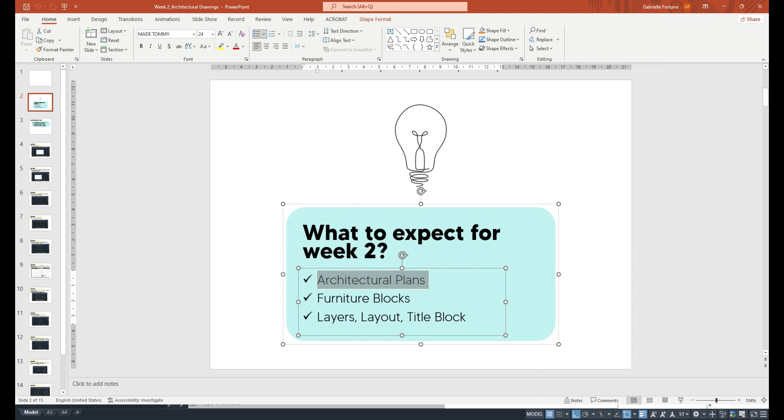First, we will tackle the architectural plans or floor plans. We will make them now. Next is how to download furniture blocks like beds, chairs, tables, etc. Next are the layers, which we already talked about in week 1. The layout and the title block, and also the dimensioning.

So in this exercise, we will make a floor plan from A to Z, meaning from your drafted floor plan or manual drawing, translated into AutoCAD drafting. We will transition from sketching into the computer. We will import your drawing.

Next is to create full specs of layers, meaning before we created only walls, doors, and windows. Right now, we will create a furniture layout as well. Next is detailing with dimensions, meaning detailing with texts like living area, dining area. We will introduce text right now. Next is hatching, meaning shading or putting diagonal lines inside a polyline. We will teach that now, and also labeling and tagging.

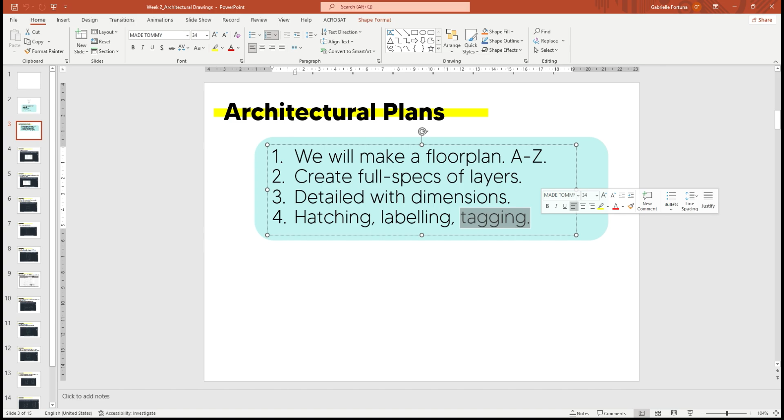So first, we will scale our image. With this exercise, I have put a series of steps on how you do this, so guided, there's no way that you will not know how. So let's start now in our AutoCAD, let's start drawing.

This is the empty space for AutoCAD itself. Right now, the status is I have the grid mode off. So we will turn that on so we can see the grid. I typed Z for zoom and then E for extents. So now you can see the grids.

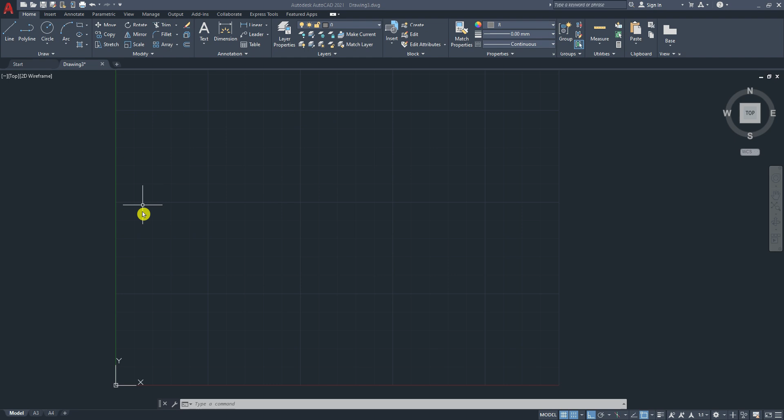What's the purpose of scaling? The purpose of scaling is that if you have a drawing that is not scaled at all with no dimensions whatsoever, you can manipulate it here on CAD just to trace it. It's not only limited to these types of drawings, but you can also import PDF, PNG, JPEG, or even from Illustrator, because not all files are scaled to millimeters or meters.

So right now, this is a typical PNG or JPEG drawing that we will import here on CAD, and obviously we don't have the specific dimensions here. So we will establish a reference point so we can scale the drawing to its right size and dimension. Even if you only have one dimension, like for example this wall, if you have this as 6 meters, that's it. If you have this as a reference line, you can scale the whole drawing.

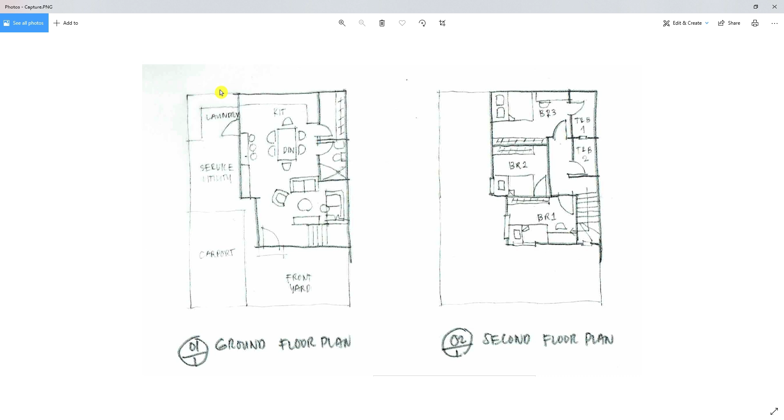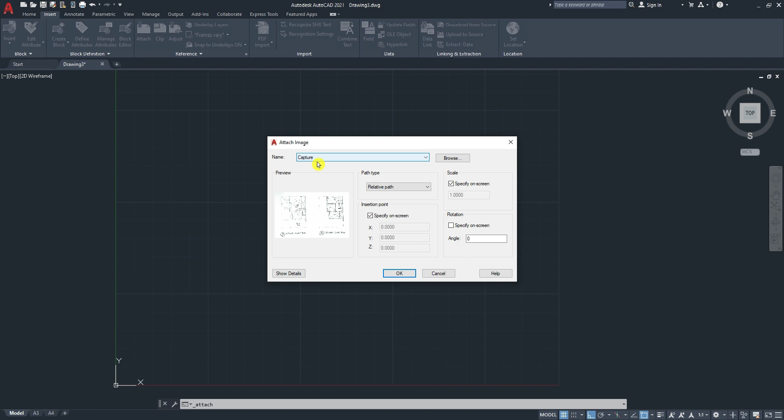So in insert, then attach, and then locate the file. The file that you have, you just scan it, or I really encourage scanning so it becomes flat and 2D. So we will go to the folder where you imported it or scanned the picture. Click that. The name of my PNG file is capture. So you click OK. Once you click OK, this is how it looks.

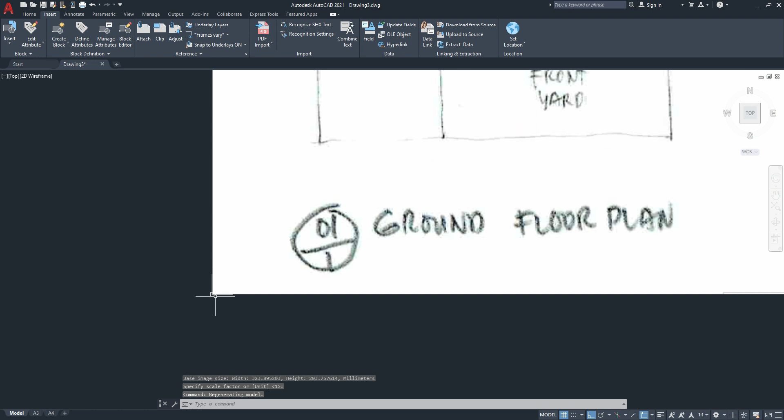I haven't clicked anything yet. And then when you click anywhere, you will have to specify another point. I normally just click anywhere. And then after that, it will be attached like this.

So for this one, I'll just have to check the units. If it's set to millimeters, precision is 0, etc. Always check this one to make sure.

And then now we will scale the drawing. So what's the first step? I propose that this specific wall here is 5.5 meters. That's it, that's my choice. That's my design. So I will scale this down or up, I don't know yet. So let's see now.

I'll make a line, L, enter. The layer for this is currently 0, since it's not yet important. This is the line, I will not make anything, I will just scale the drawing. So for me to know, I will type 5.5 meters or 5,500 millimeters.

So since I'm set to millimeters, I'll type 5,500, and then enter. Once you enter, since this line is bigger than your drawing, I will scale the drawing up because this is 5.5. Remember? So I made that.

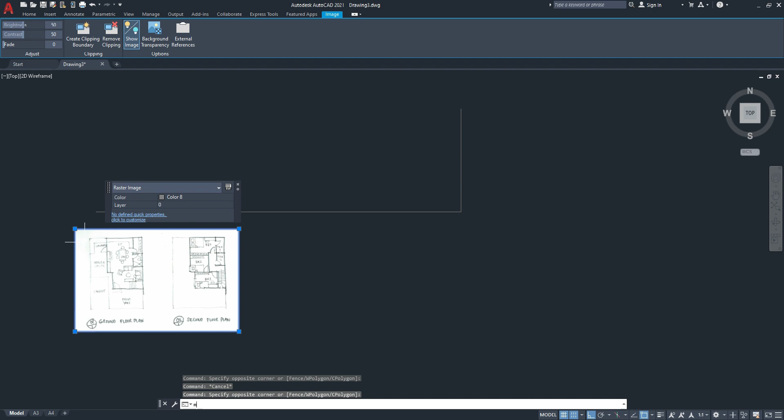And then next, since this is 5.5, I will select the image, press M or type M for move, enter. This cursor is tricky because the image is white and the cursor is also white, but bear with me. I will put this cursor here. I hope you can see it. Here.

I will put that here and then press F8 so it doesn't freeze, to activate ortho so the movement is better. And then I'll put it here at the very end. So what happened now is I'm positioning the drawing, this wall specifically, in line with this specific line from CAD so I can scale it.

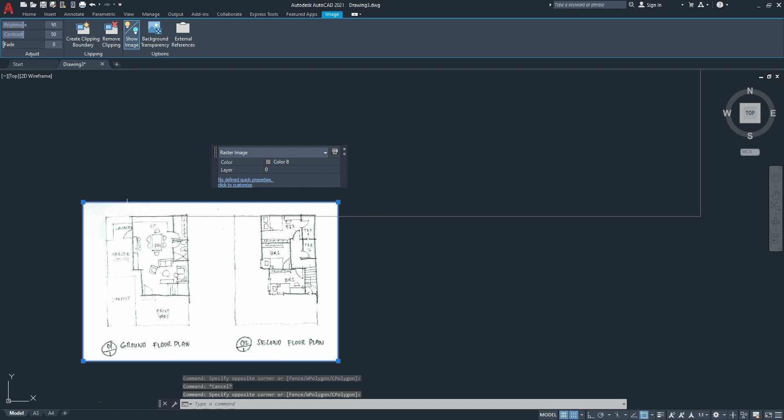Just rewind this video if you get confused, because this is a process. And then next, I'll highlight the drawing, press SC for scale, SC for scale, and then enter.

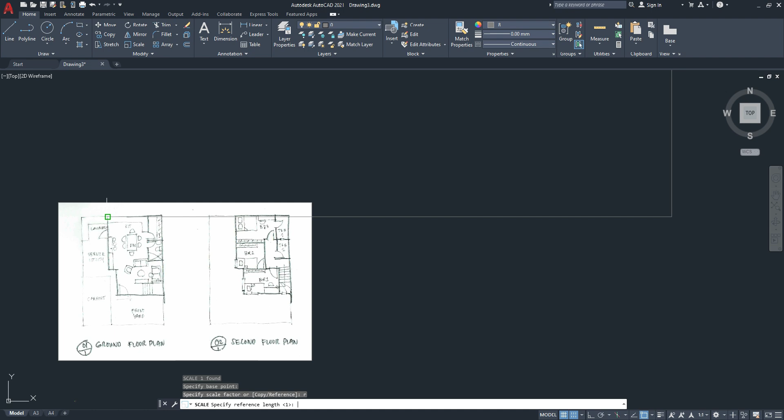First, it says specify base point. So the base point here is the base point of the wall, this is my wall. Next, specify scale factor. I'll type R for reference because I want to do scaling by reference. Press R, then click again this point. Next, click the image's other point, which is this one, the wall, so the third click goes here. And there, you have scaled your drawing.

So that we can see it clearly, I will make this into cyan and make it bold. So, you got the point.

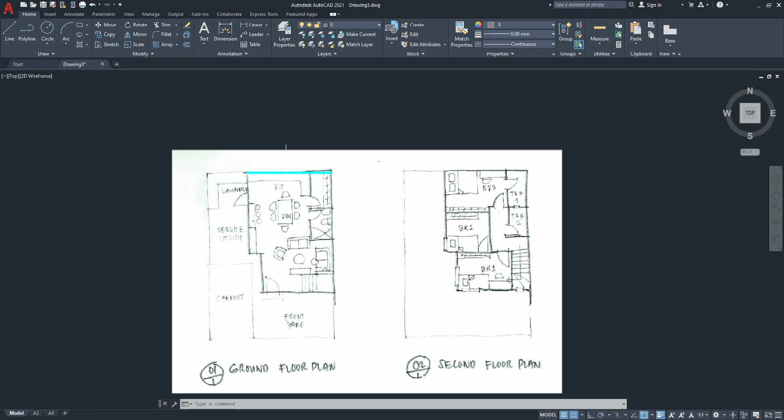Since the PNG or image file is not yet scaled, I scaled it to 5.5, which is literally the same scale as CAD. So this is numerically correct now, 5,500 is the wall itself of your drawing. Why am I teaching this? So you would know how to scale any type of drawing if you're given a drawing that's not scaled at all, so you can scale it. I've used the SC command many times already and it's very, very useful.

You'll just memorize that in the future. So here you go, the image is scaled now. This is 5.5, you don't have to be super exact, unless CAD lines are also what's being scaled. But this works as well, not only on PNG, but also on CAD lines. You can scale overall.

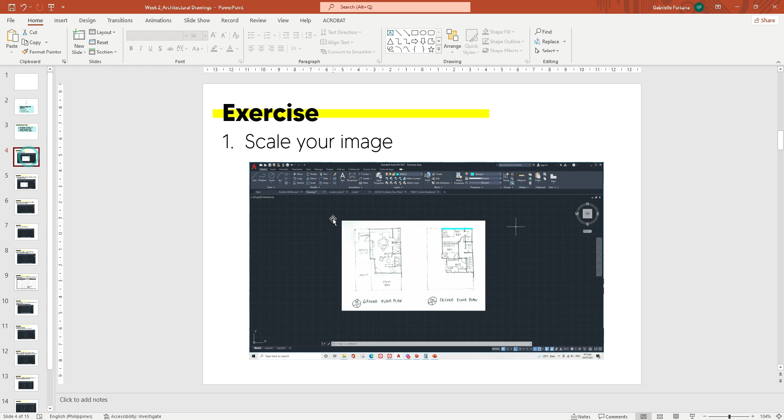So let's go back to our slide here. After scaling your image, which we have done, now we will draft our walls, just the outline of our walls. Take note, when I draft my walls, I use the lines of the center line of the walls. Then after that, I offset the exterior and interior using the defpoints layer. You'll know why, just follow and watch for now.

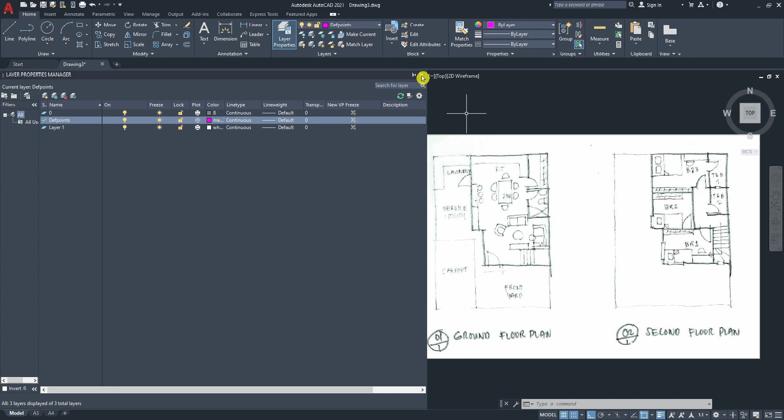Right now, I have set my defpoints. I'll type LA. I have set my defpoints with magenta as the color. Take note, I made it magenta so it's clear in the video, so you can see it. But if I use this in real time, I use graphite gray to symbolize like a pencil, not final yet. But right now, I used magenta only.

Next, after that, checking the defpoints here, check as well that all of this should be by layer, because maybe some of yours is continuous or whatever. Just make sure everything is by layer only, meaning whatever you're drawing here, whatever lines you're drawing, the properties of the line are by layer. Okay, so I'll type PL.

Since this is already scaled, I will just follow this one. So I'll type 5500. And then going down, I will just follow my draft, because this draft is really scaled in the real world, but it has no dimension yet. So this one is probably 8,000. It's up to you, I'll make it 4,500. So we're just following the lines here.

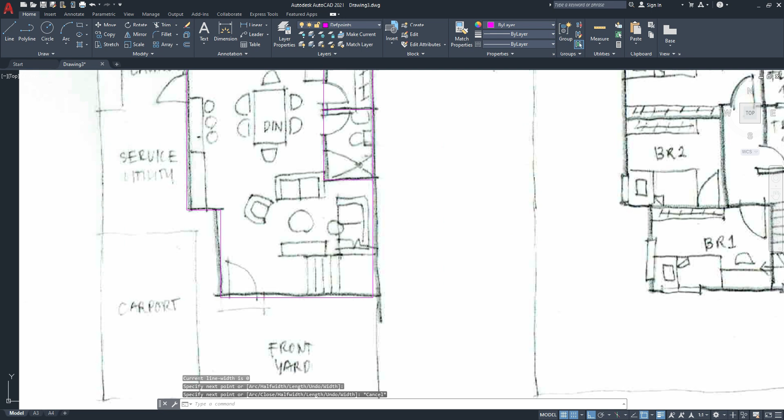So 1,000, like that. Follow the whole lines. For example, that's it for now. And then I will also follow these lines here for the CR and the wardrobe. This is typically just the outline of all the partitions inside. The stairs, I will not put yet, okay, so only the walls for now so we do it one by one.

Then I will select the image and move it somewhere. But when you move it somewhere, make sure you know how many meters you moved it. So for me, I'll put 15,000, so that when I move it back, it's still exact. Okay, so here is our outline for the walls, the center line of our walls.

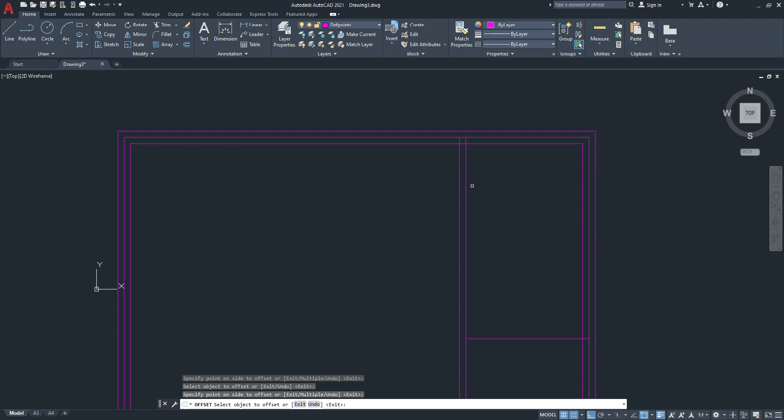Now what I'll do is type O for offset. Make sure it's on defpoints, not printable. Since my walls are 150mm thick all in all, I divide it by 2, so 75 outside, 75 inside. I'll type 75, then click here, 75 outside, 75 inside. Same for this one, 75 inside, 75 outside. I hope you get the point here now.

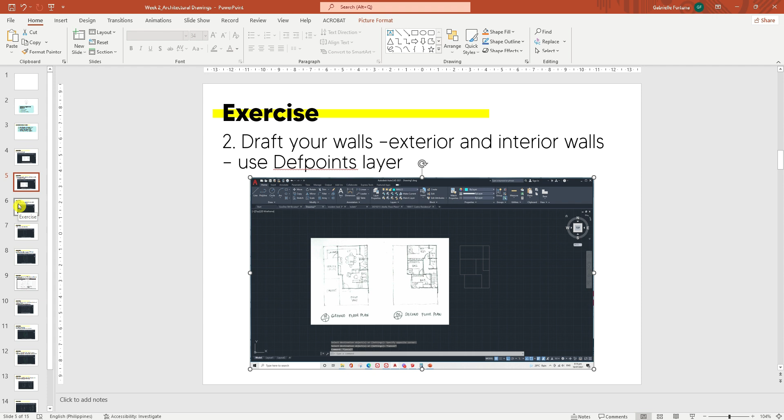So your walls will be like this. Let's go back to PowerPoint. So this is what it looks like, we have a draft there with defpoints as pencil marks. And for the second one, it will look like this, except it's magenta. So offset 75 in and out for exterior walls, depends on your design. If the thickness of your wall is only 100, put 50 and 50 inside and out.

Okay, next, put doors and windows. So let's put doors and windows. I'll type again and make a new layer for my doors. It's unprinted, oh, so make sure it's set to printed. So my doors will be yellow. And then I'll change the magenta because it hurts the eyes, so I'll change that so it looks like this now. Then doors will be yellow, while my windows will be... actually the doors are red.

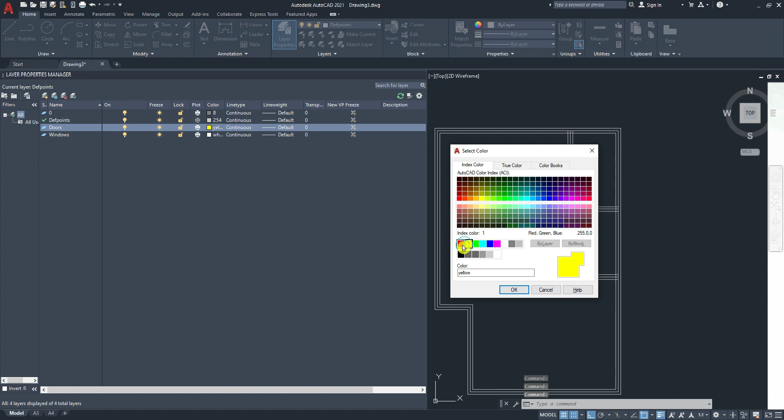And then, yellow ang aking windows. Okay, gi-default ko muna ang line weight because you will decide, guys, kung anong line weight niyo.

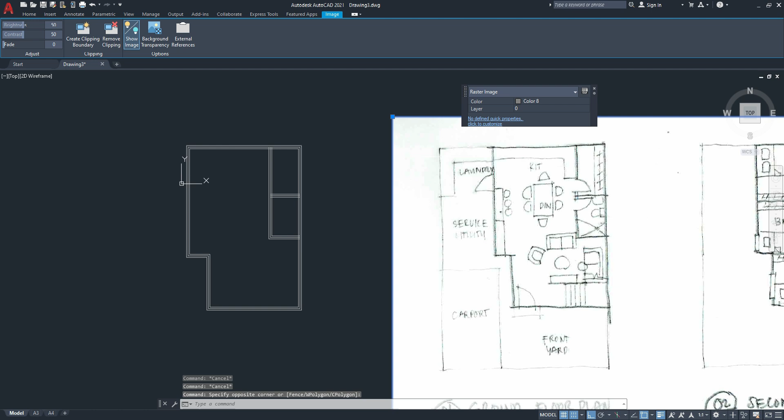So I'll make my doors. Same thing na ginawa natin before. I can put back or move back, M enter, this drawing. Balik ko siya 15,000, i-remember niyo lang ginawa niyo. Then para, I'm pressing the control, the scroll button here. Kaya siya ganito ang itsura.

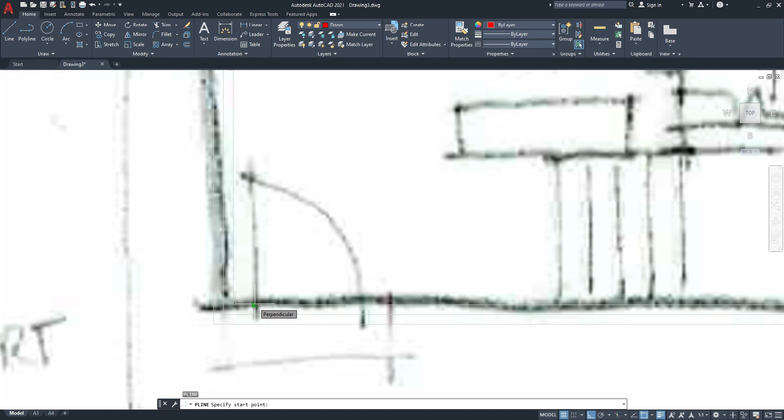Itong door, let's make a door here. PL, same thing na ginawa natin. Oh, hindi pa naka-layer ako ng door. So, PL, hindi siya masyado klaro. Siya mag-snap. So, that's my door.

Copy, paste. My door is 900, 900 ko na lang. Then, same thing. This is our lesson 1, so hindi ko na to ulitin.

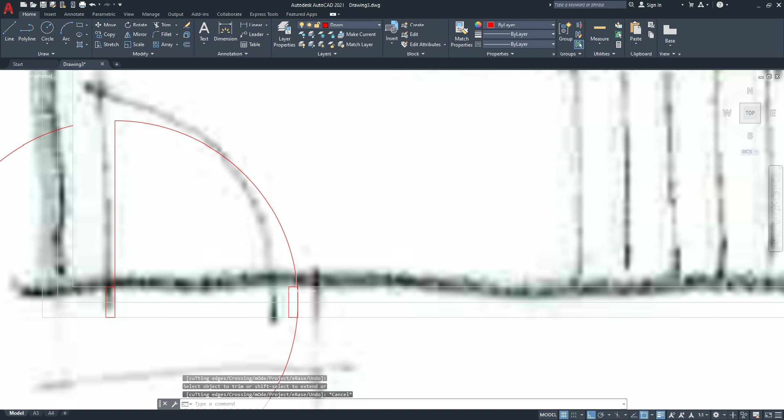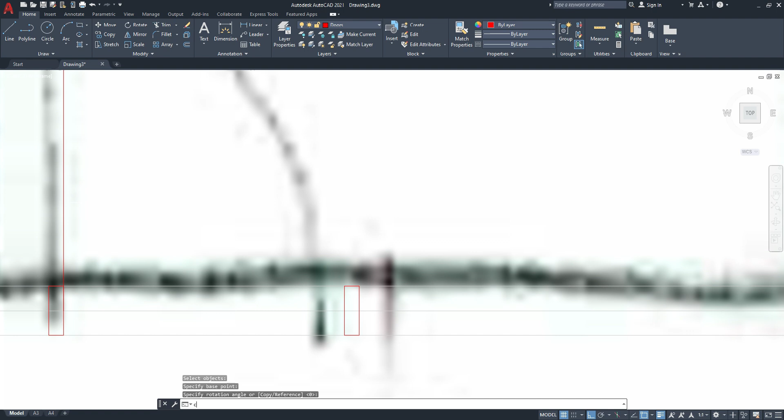TR, double click for trim. At, mali. PL, kaya kailangan dyan dito. Kaya magkamali siya. Rotate, RO. C for circle, and then TR, double enter.

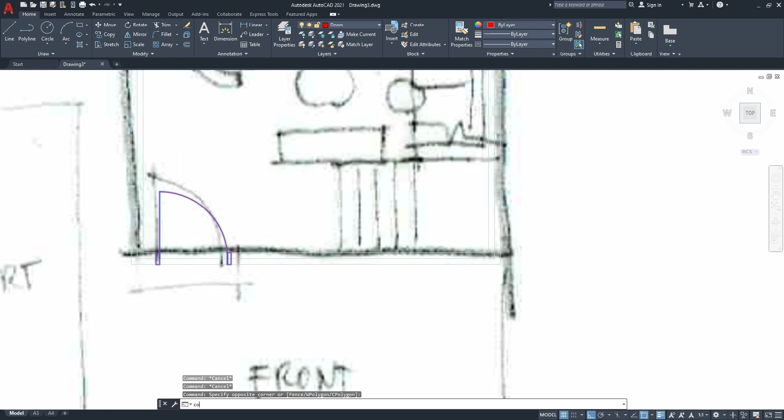Sa first lesson na natin ito, so I hope you know na already. Okay, so linisin lang, and then after this, I'll make this into a block. Door 1. So for the purpose na mabilis lang, all the doors are door 1. But sa inyo, for sure, you have your 900 na door, 600 na door, etc.

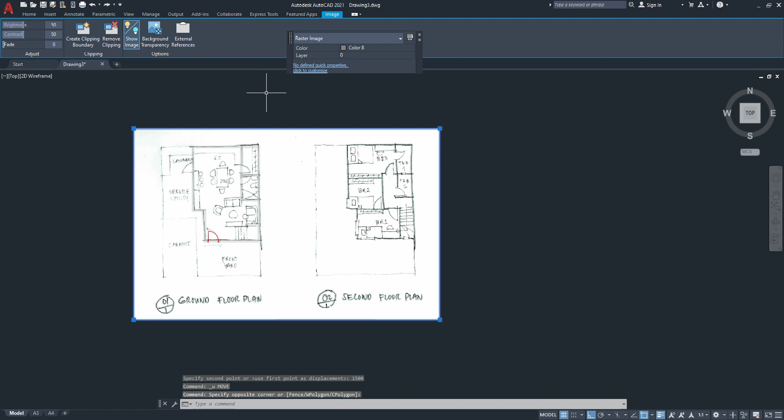So I'll put my door here. I-memorize ko na lang muna ang door kung saan because hindi na maklaro if nandyan ang image. I'll move the image again here. I'll move it again there. So yung def points, guys, hayaan niyo lang yan, hindi mo yan ma-print, so it's okay that it's there.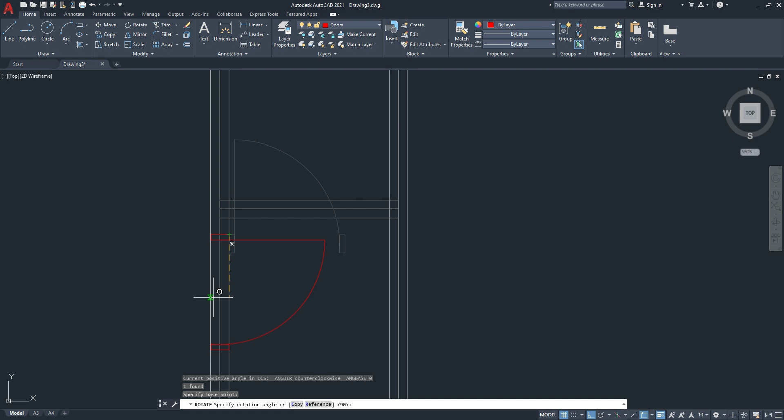So I'll copy-paste this door, here, rotate, RO. There, oh careful again, RO. Yan. Then MI for mirror, and I'll click here para dito ang center, kaya MI. Do you want to erase? No, so type N. So that's your door.

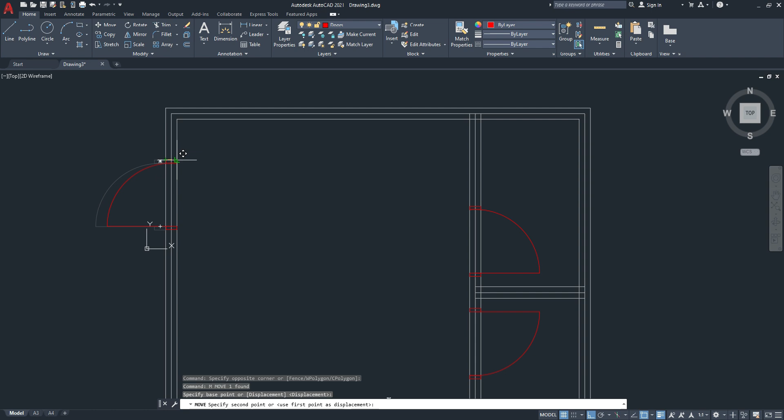After that, door naman dito sa may kitchen banda. I'm just checking the orientation. And then move. So that's your door. Next, your windows, kayo na bahala niyan.

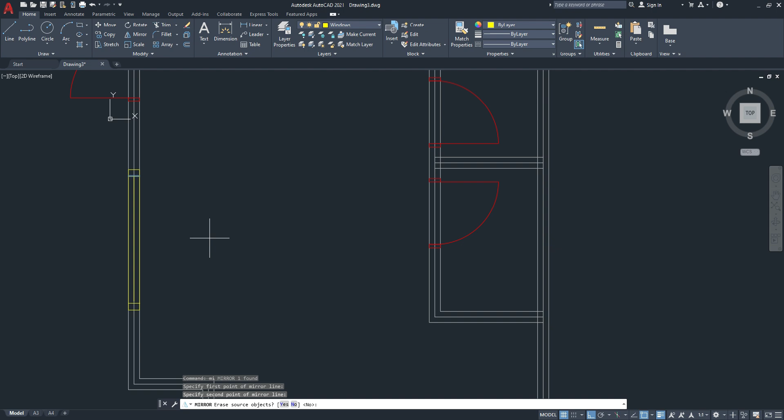So for the windows, I'll change my layer. REC na tayo para mabilis. So for example, dito yung window ko, that's my window. Draft ka lang ng window. Copy-paste ka lang, or mirror ko lang yan. Then put it sa midpoint ng window mo para dyan. Yan, so that's my window.

So imagine, guys, itong window lang at door ang printable, but your def points not yet, kasi hindi pa final ang wall. Ito ang suggestion ko, last niyo na ang wall para isang drawing niyo na lang lahat. Pag na-plus na position na lahat ng doors and windows, saka niyo na siya gawa ng walls.

So itong window, I'll make this as a block. Window 1. Then copy and paste. So example lang yan, I'll move it here. Copy and paste ulit, move it here. So guys, sample lang to ha.

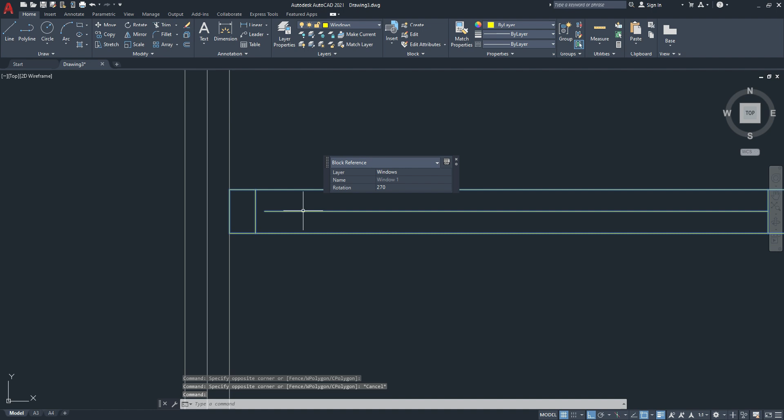So, RO, wala. See? So here's the thing. Since naka-block tayo and mali pala ang drawing ko, you can just double-click that, open this one, and then correct. Isang correction lang, okay na lahat ng windows mo. Okay, so this one, rotate, RO. And then I think I'm done with my windows.

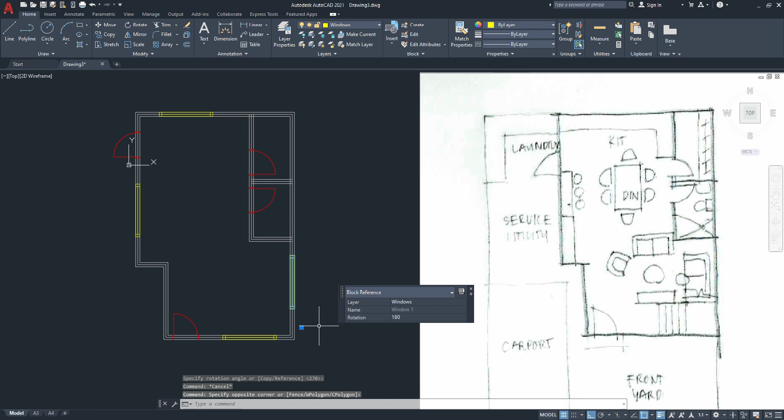So after na tapos na kayo sa window, let's go back here. So you have your windows and you have your doors. What's next? Outline now the walls in your wall layer. So I suggest start with exterior walls first, then the interior.

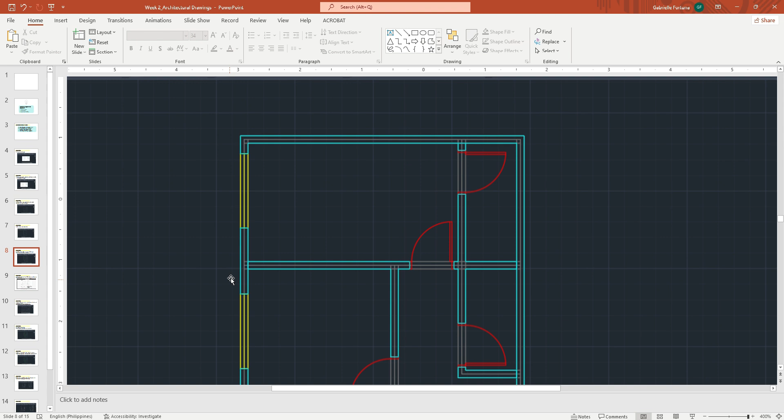So ang itsura niya guys, balik pala tayo mga doon. So itsura niya, ganyan, malinis na, kasi na-outline niya na. So make a layer of a wall using cyan. You can always make your own color, no need to make gaya. Then kayo na mag-set ng line weight ha.

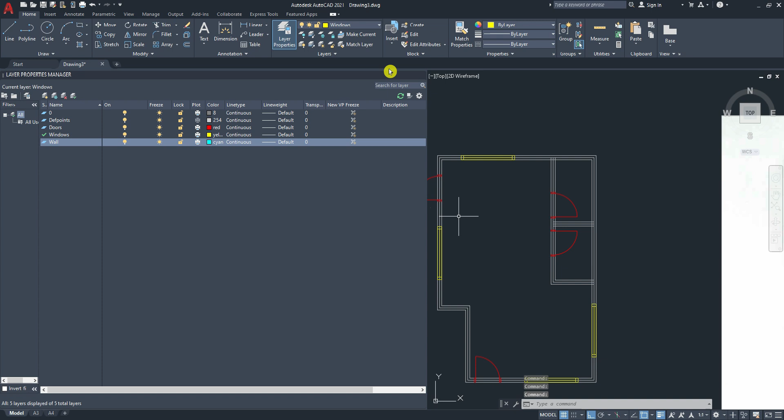Okay, PL, so I will just make the wall layer active. So there, so halos ganyan lang itsura, guys. So parang siyang i-outline lang.

And then, if you can see this type of layout, mag-REC na lang kayo para mabilis. REC for rectangle, para diretso lang ganyan. Ganyan, gets niyo? Then ito, PL na naman, and that's it, you have your floor plan na.

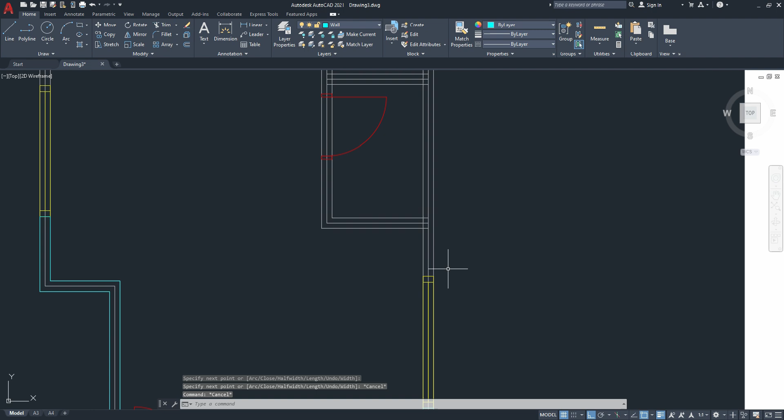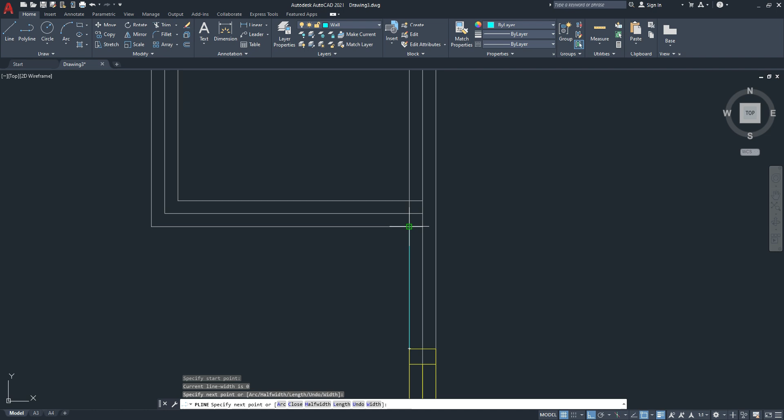Very easy, very convenient. This one, others do this. REC, and then tibok wall, and then i-trim-trim na lang nila. But for me, I like it na parang seamless lahat, parang very clean, very tidy. Parang ganyan na siya, so parang unending tracing na to siya.

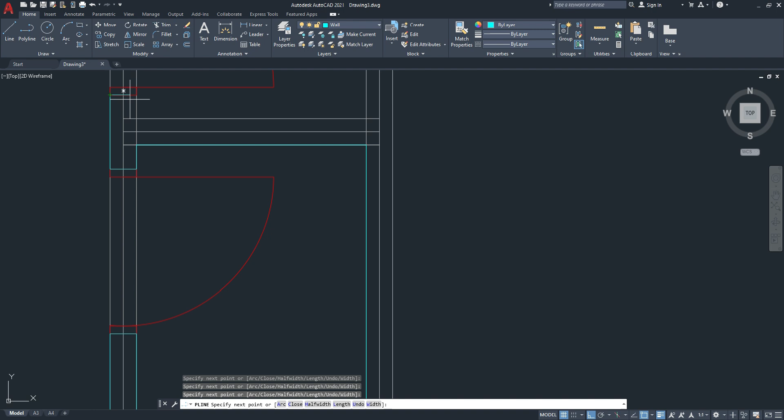After the walls, what's the next step? Go back to your PowerPoint. It is to download, or shop as I call it, for CAD blocks on the net. Shop for beds, toilets, sink, range, sofas, and etc. So this is an example of the tab that I typed at cad-blocks.net for toilets. So let's try to make a bathroom. Okay.

Let's type bathroom CAD blocks. So, bathroom CAD blocks.

Let's see, and then extract files. After extracting, I'll open it, and if you can see, it is an AutoCAD file now. There are two ways for you to import these into the CAD.

First is to just simply drag it inside the drawing, but I don't normally do that. What I do is open it. So it signifies that you are opening two drawings already here. Don't be confused, just switch between the two different drawings.

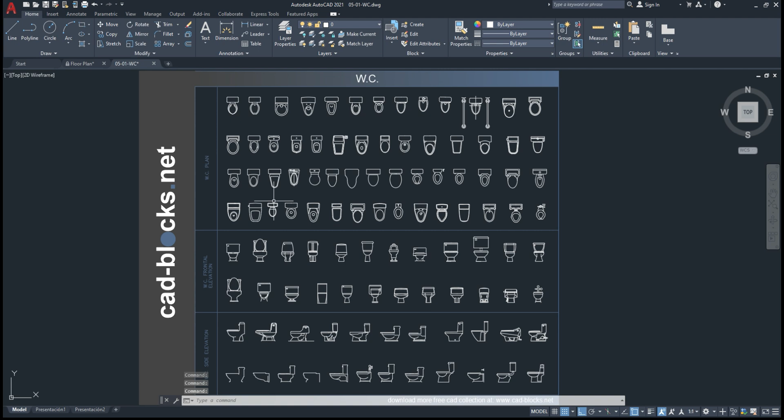If you want to go back to your floor plan, then go. And if you want to go back to your toilet, just click this tab, okay? So right now, I'm going to select the best toilet for my liking.

So this one, maybe I'll choose this one. I'll copy paste this. If you can notice, this is a block. So I'm copying a block and then pasting it here.

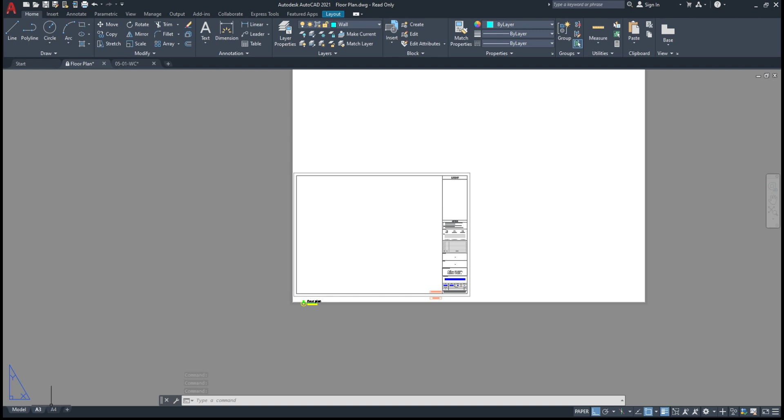If you get confused, guys, go to the model always. You will click this tab here at the bottom, click on the model, and then I'll simply paste here.

So what happens? The block is now on layer 0, which is okay. I'll make a new layer, and make a furniture layer.

For my furniture, I really want it to be very light and not colored black, for me, huh? So I'll go to true color and mix a gray to my liking.

For example, I have that already, that's a true color again, that's a true color. And then after that, I can use it.

So I'll select the block and then change it to furniture. That's clear, right? So all the lines in this toilet are set to my liking, which is in the furniture layer.

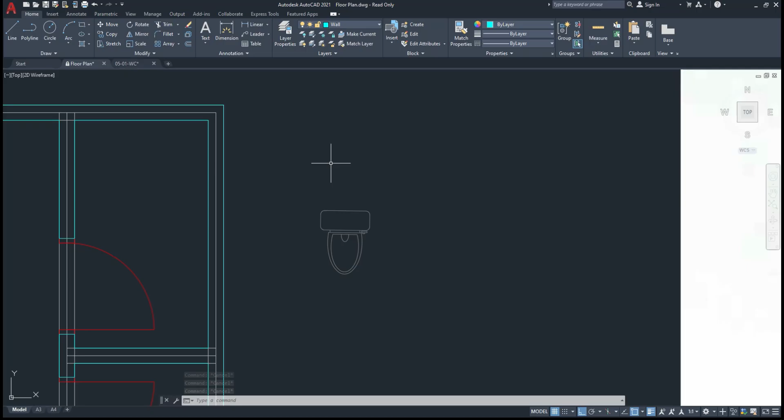Beware, guys, because other blocks don't have that type of behavior or properties. So what I normally do to reset the lines from other drawings: I select the drawing, type X, meaning explode, and click enter. After that, I exploded the block, and if you can see, I can select each line. So it's literally exploded.

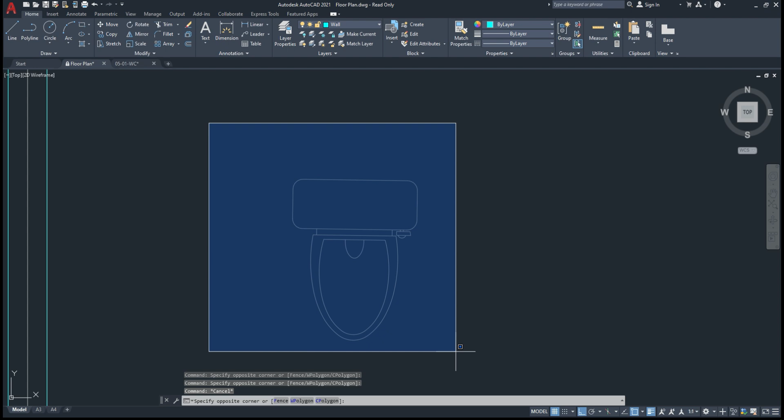So the behavior of the lines or the layer of the lines, I can manipulate them now. I select all the lines, the polylines and the lines there, and select into furniture, and that's it. And I re-block them. My term for that is resetting the block.

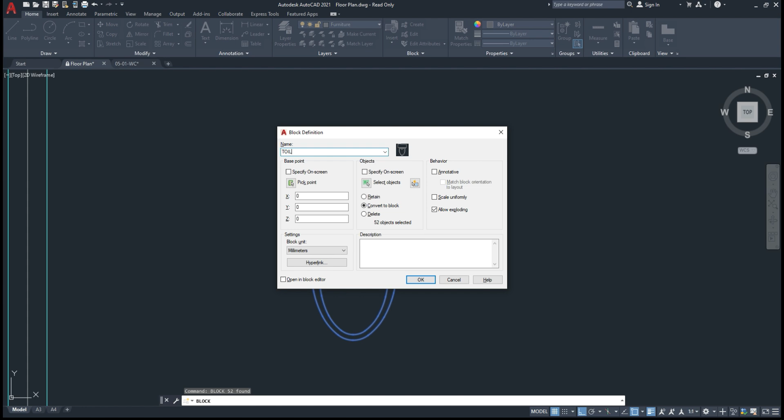Okay, so this is the toilet. So that's how the blocks are behaving. So I rotate this one to make it fit in the bathroom.

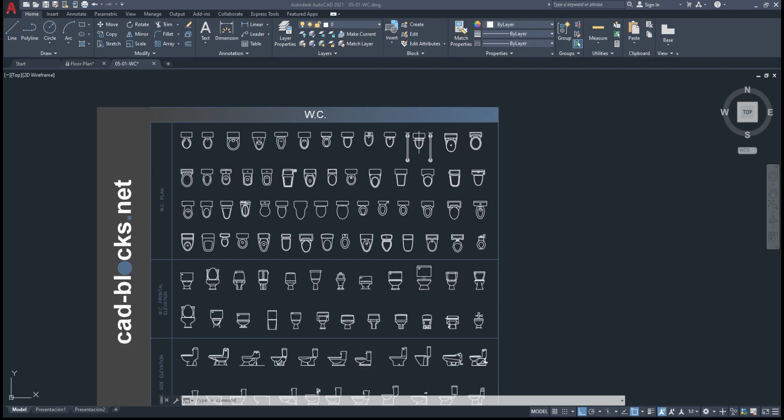For example here, now go back here again, just making sure, for example, I want a urinal. I can also type in here in your search engine. And for this case, if you can see, you also have your section and side elevation. So everything is provided if we will make the sections in the future.

Going forward, I will not put into details because you will put all of the furniture that you want. Now I have put my living room, simple ones, dining and the toilet, just to give you an example.

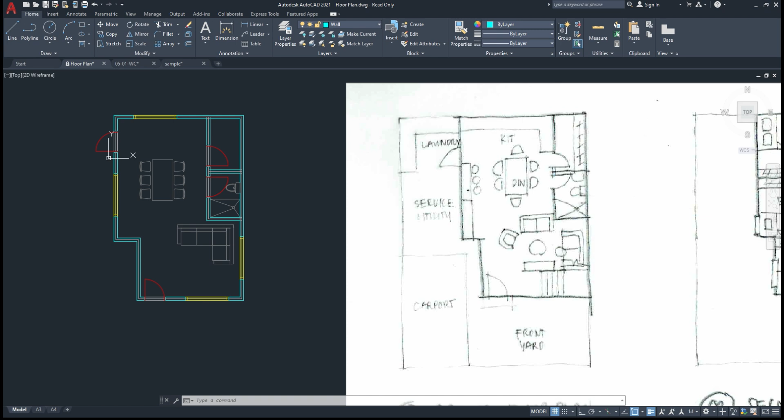You will fill your floor plan up, all the floor plan from your service utility to your laundry or whatever, like in this drawing. There's also a wardrobe, there's a kitchen. So right now, for time's sake, I will not do that now.

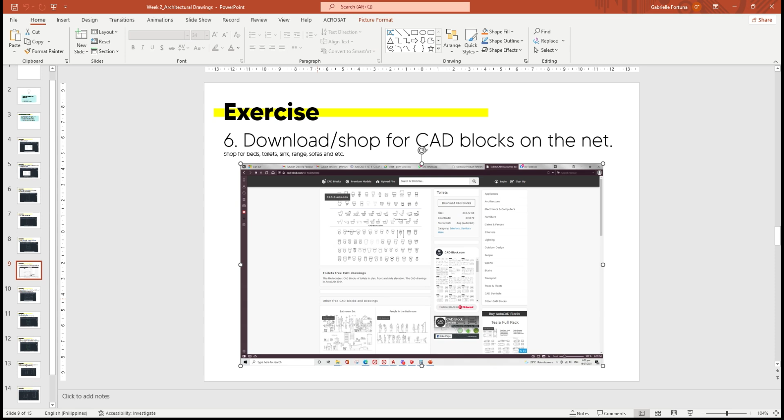Fast forward a bit. So after you have done all your furniture, what's next? You also have here copy paste, change layer. I put that in the series, and it will somehow look like this.

About dimensions, I have made a preset or a template for the dimensions. This is a very, very basic template that would somehow fit different scales. In Revit in the future, you don't need to do this because the default per scale is already set.

But on AutoCAD, our goal is to at least somehow make all the dimensions proportional to your scale. So I'm giving you this drawing dimensions in a lower version so that it would be compatible with any version, 2013, 2020, or whatever.

For example, in my floor plan, I'm switching drawing tabs. Okay, so in my floor plan, I don't know what type of dimension fits me. So what is the command for dimensions?

DLI, meaning dim linear or dimension linear. And then I'll press enter. This is just an example. So for example, from this wall up to this wall, what's the dimension? It's 5551. If I go to my template, which I will send you, I will copy this one, copy all.

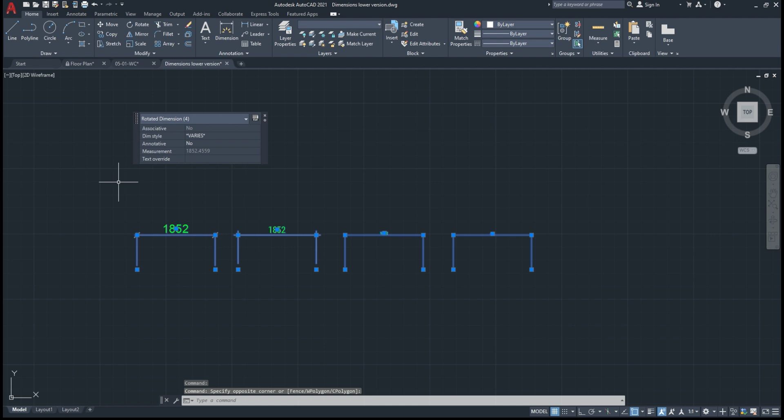And then paste it here.

If I compare the floor plan I'm making versus this dimension here, which do you think fits best? Number 1, where the text is proportional in size, and number 2, which is very visible to the eye? Of course, I think this one, the second one, fits best.

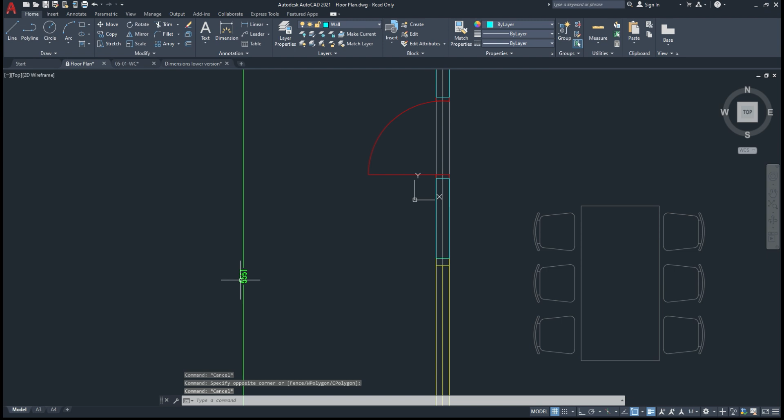This one that I'm doing now has a different property for dimensioning, while this one is also different. So there are also layers for dimensioning, which we talked about earlier.

So if I want this type of dimensioning applied to this, I'll type MA, which is match properties, enter, and I'll click the first one, whichever is my model or whatever I want to copy. Then after I click that one, I click the other one, whichever I want to influence for my dimension, which is this one. So I click, and that's it — I just pasted the dimension style.

So this is how it works — you go and make all your dimensioning. For example, this one, I'll put it here, because you have your default dimensions, it's not preset yet like what I did here. So if I have this one, okay, that's set. I have my dimensioning already, but it's not using the same layers as this.

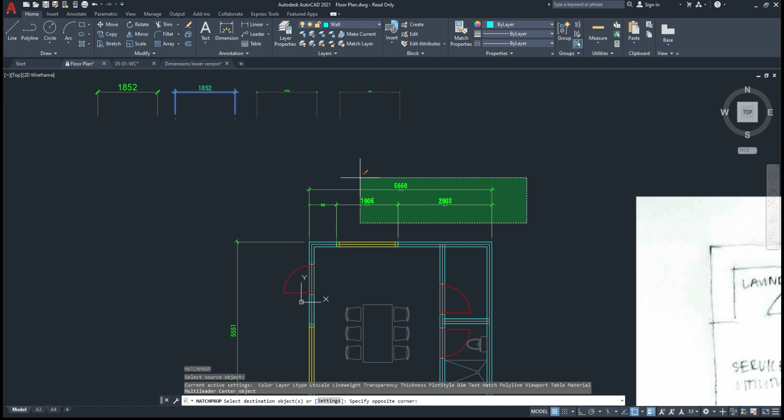I'll type MA again to match this one. Click this first, then click here, and then drag it on like this so that all the dimensioning gets influenced. Then, fast forward again — if you've done everything for the dimensioning, it would look like this.

Make sure everything is aligned. I will teach you one command which I use for dimensioning, which is stretch — S for stretch. If I click S, enter, then select from bottom up this specific area, then enter, I can drag the whole dimensioning so it doesn't get disturbed.

For example, if I want it to be the same as this at the bottom, I'll just stretch it like this. And if I want only this specific area to be stretched, I'll press S, select only this area specifically, then enter. I can move it up or down, so I can isolate it like that.

So whatever you select in the specific box you created, again press S, and whatever you've selected — like this green box — only what's within the scope of the green box gets stretched. But if I also include this outer one, it will also move. It won't only apply to dimension, it will also apply to all lines that are included.

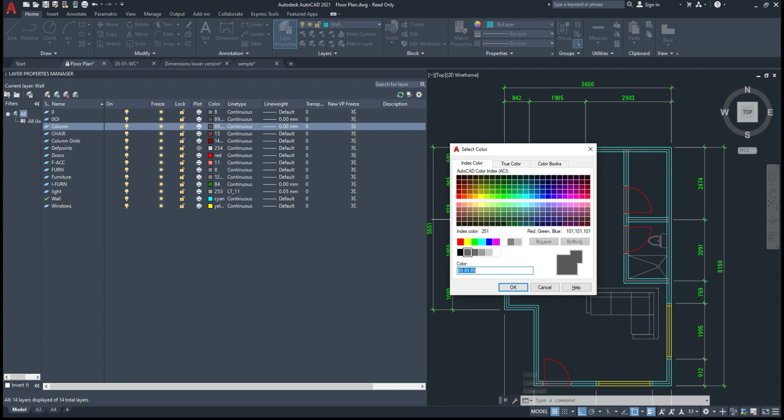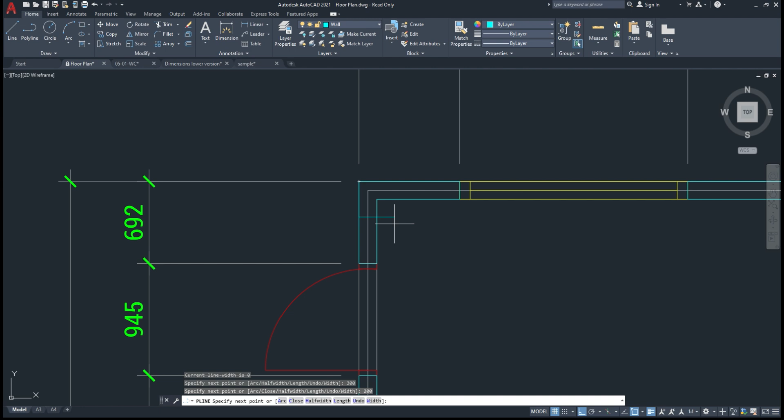So I'll make my column layer, and make it, let's say not true color but indexed, like blue. As for the line weight, that's up to you. So for example here, I'll make a column, let's say 300 by 200. There, that's my column.

I made it here just as a guide. So now I'll move it here for instruction purposes, because I'll make a hatch inside of it. So I'll select this one, change it to the column layer because I wasn't set to column as the current layer. Now it's in the current layer.

Now, since the column is solid, the main foundation of the building, I want it to be hatched inside. So I'll type H for hatch and click inside to fill it in. You have a lot of hatches available — bricks, diagonals, solid. For now I'll use the solid one and fill it inside the polyline. If I'm happy with that, I'll just click enter.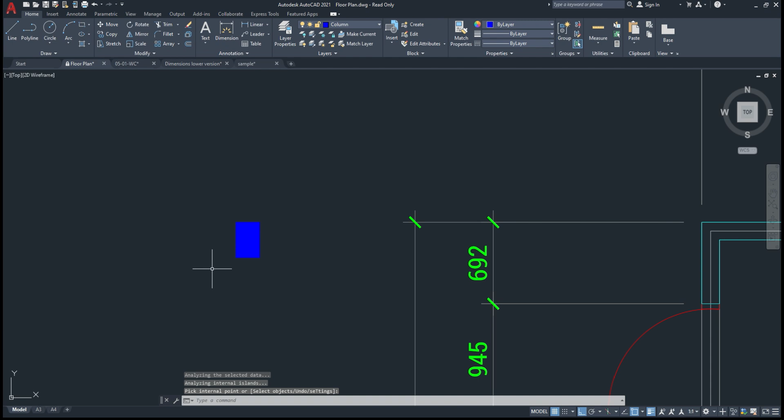And that's it. If I have lots of columns — for example this is my column 1 — you'll have many columns because it's not only 200 by 300. You also have 300 by 300, 400 by 300, depending on your structural conceptualization and your structural engineer. For now, let's just do 200 by 300.

So I'll type this as a block and name it column 1 — name them C1, C2, C3. Then I'll copy paste using CO.

Normally, it depends on you where your endpoint is. For now, my endpoint is here in the middle. I'll click it here as well. So for example, like that. Others don't want the corner to be big, so we move it there to your liking.

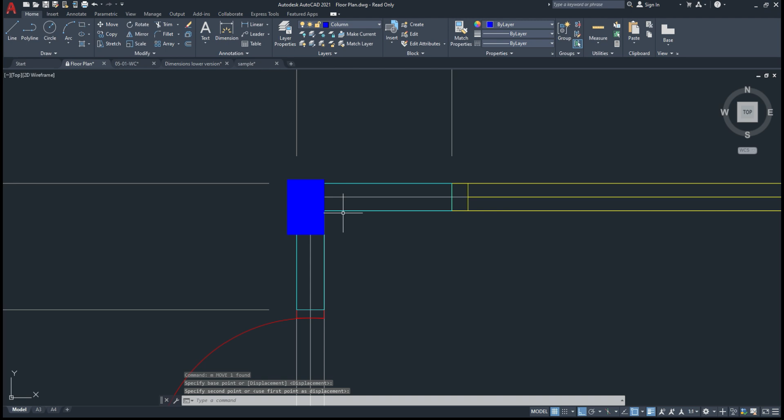For interior designers, they don't want this bump to happen inside, so they move it out, like that. It really depends on you, but for me, for now, I'll move it.

I'll select this one, press M. Find the midpoint of the column, which is this one with the triangle. Click that, then move here. So that's it, that's my column.

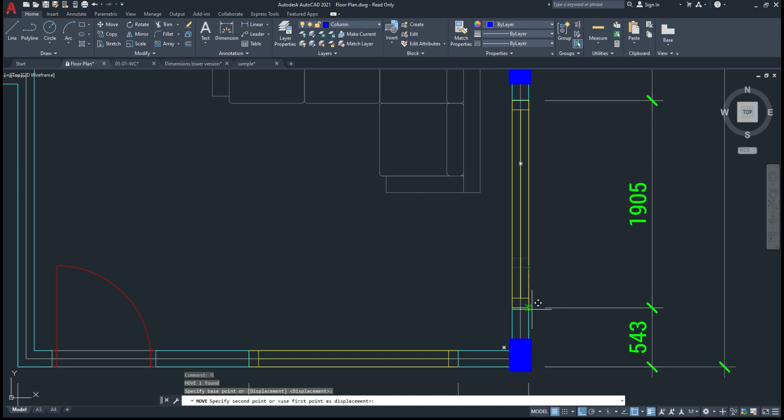That's really how stretch works, it's not predictable. So that's it. Your dimensions moved as well with the walls. So yeah, and then after that...

So we have, let's say, columns. We're happy with this. Next, after the columns, I will label the areas inside.

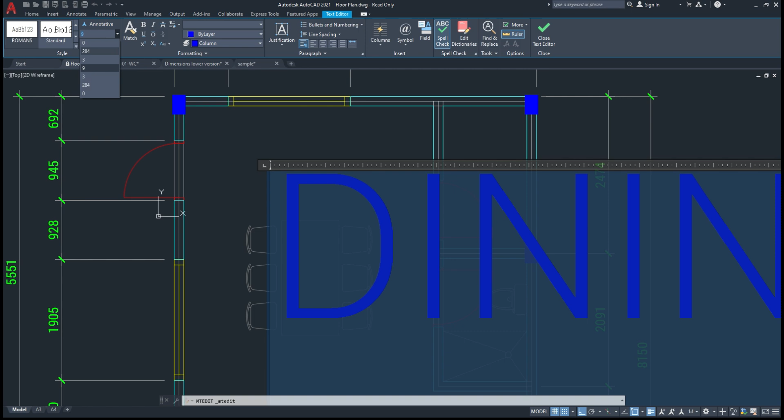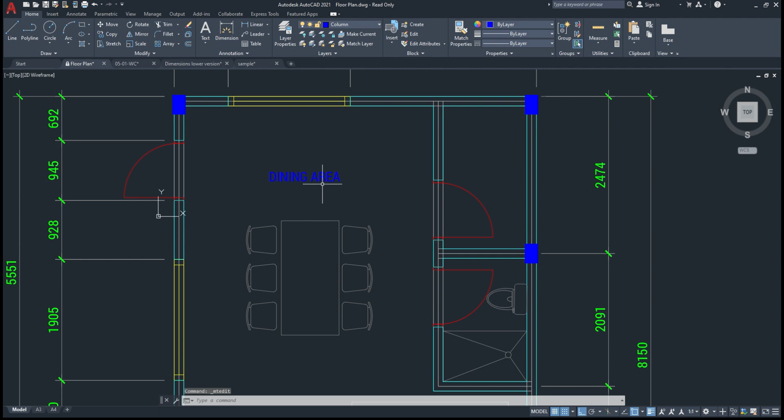Honestly, I'm not really a fan of that if you want it quick, because you need your own layers as well for your texts. So you'd make your own, like this. For example, I already made one text with this size—I have my Roboto Condensed. We'll have a separate lesson for editing your dimensions and texts as well.

For now, I'll undo. For example, it's this small at first—we haven't discussed that yet. What I normally do is just type SC for scale, click this, and then extend until it's okay.

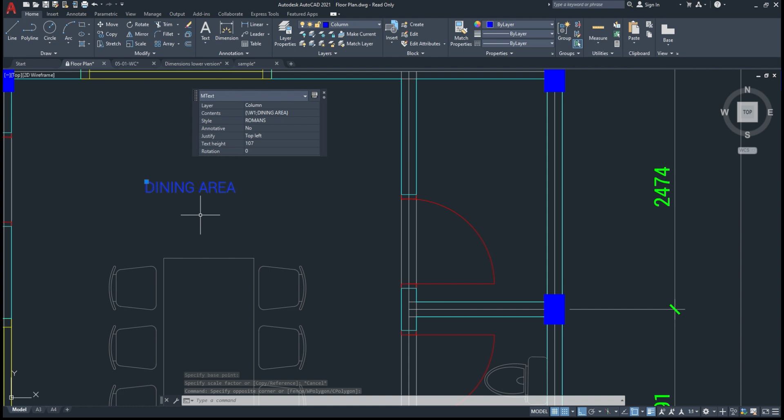Like that. Or if you want it bigger, just repeat the scale. Also, normally for scaling, SC again, enter—you can use math. For example, if it's this size and you want it 1/4 bigger, just type SC then 1.25, so it grows not by half, but 1/4 bigger.

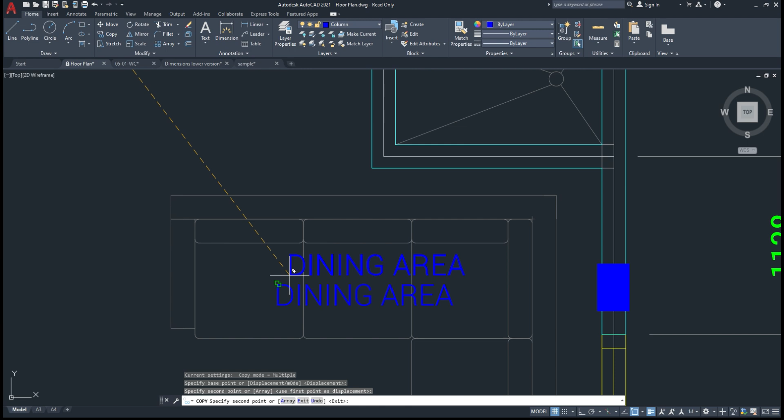This one, I'll put it here. Just move it. Then copy-paste, CO. I'll copy-paste here, here, here, and here. And I'll type 'living'—edit each one yourselves.

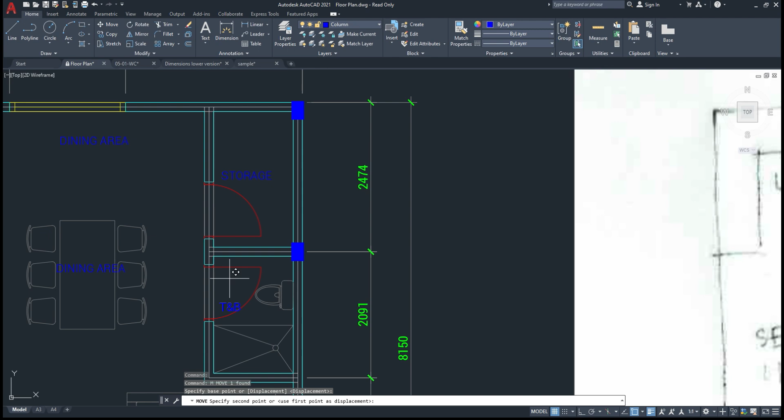Make sure all the main spaces match. So here, let's say this is storage. This one is bath or T&B—I won't complete the T&B, guys. So, T&B—move it so it looks nice too, with some beauty to it. This one is the kitchen.

This is how your floor plan will look like. It's not complete yet, of course, because this is just my teaching example.

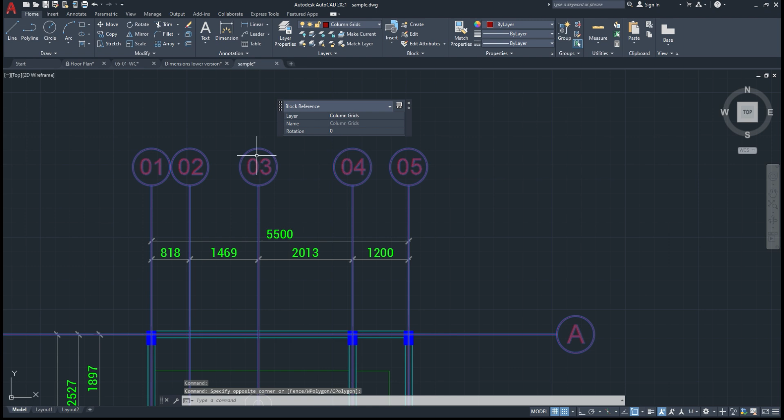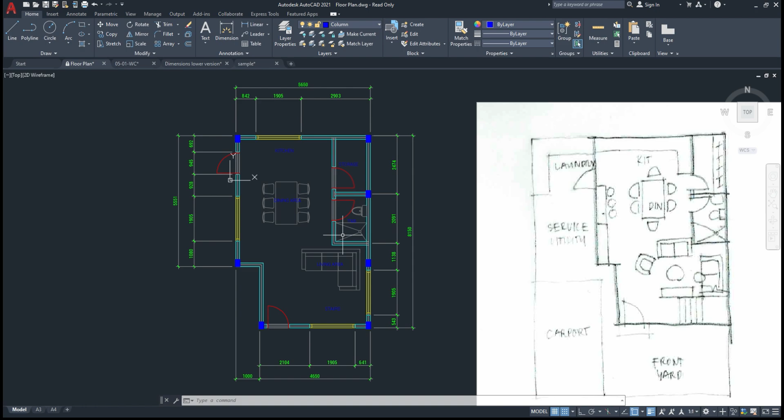So here are our floor plan requirements. First off, the lot size is 10 by 15 meters, no firewalls at all sides. What I did has a firewall, but my requirement for you is no firewalls.

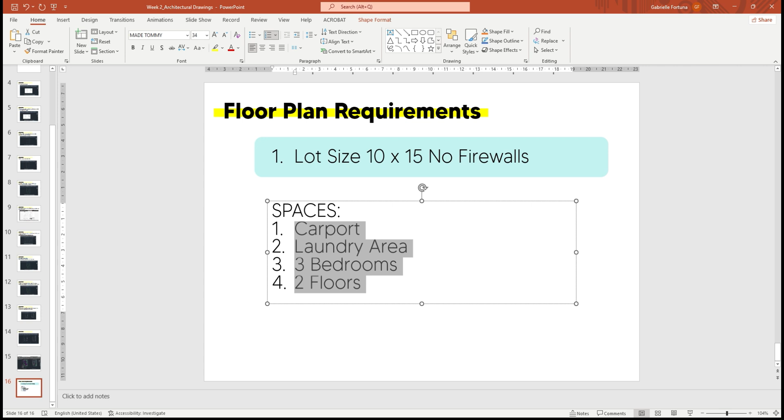Next, the spaces are the basic ones—of course you have living, dining, kitchen, etc. But these are the additional and really needed ones: you need a carport, laundry area, 3 bedrooms with bathrooms. You can have common bathrooms, powder rooms, etc., and of course 2 floors, the ground floor and second floor.

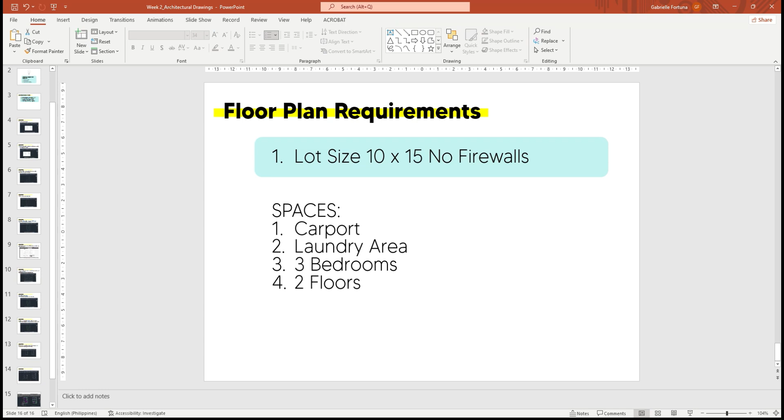And then, keep in mind right away that we won't use a flat roof—only hip or gable roofs are allowed. So this ends my week 2 lesson.